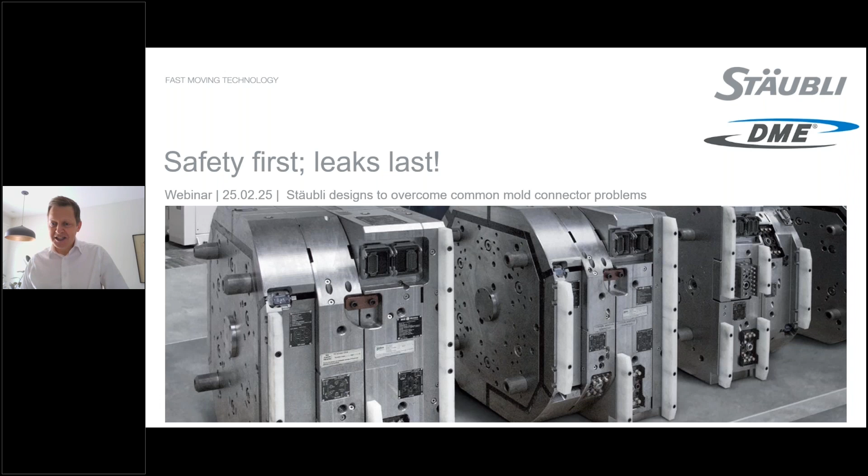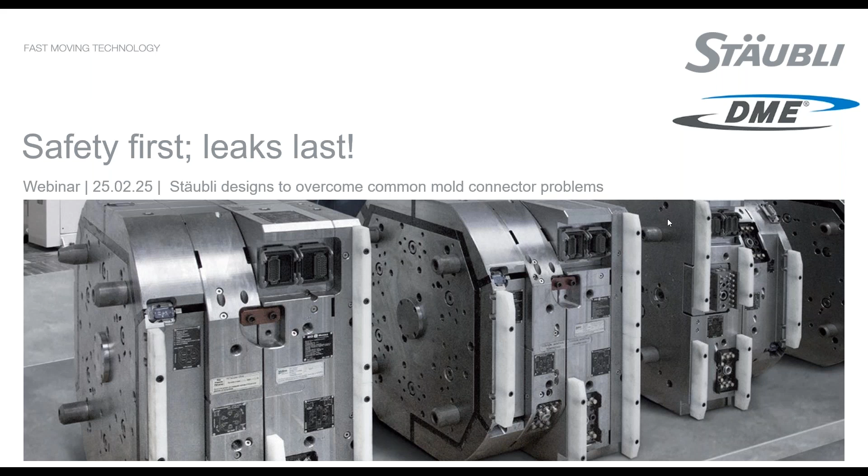Okay, so as Mark mentioned, these solutions we're talking about today are already live and available on the DME eSTORE. From Staubli's side, we're very happy to partner with DME, a company with a long and successful history in the plastics market. I believe DME started in 1942, so that's 81 years. Staubli has been making fluid connectors since 1956, 68 years - not quite as long, but we're very happy to work together and bring DME's customers Staubli's range of high-performing connectors.

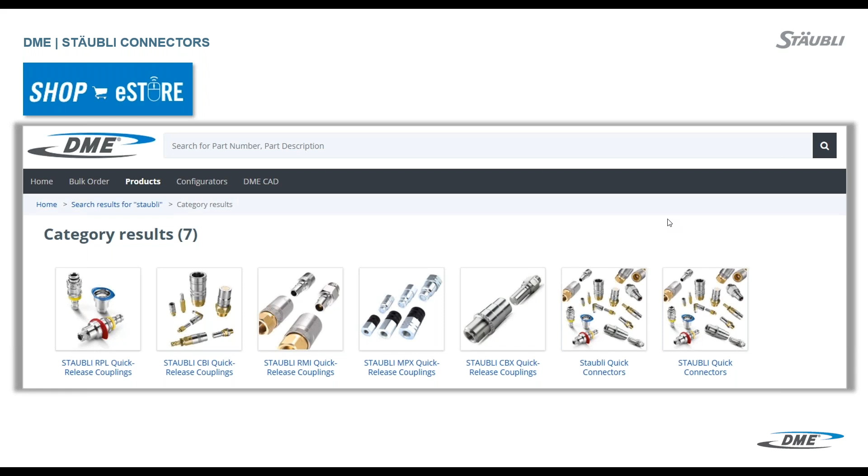So I just said high-performing, and that is really my goal today: to explain where some of the issues with connectors come from, what's behind a good functioning connector, and how they can help companies improve overall efficiency in molding operations, whether it's connecting mold circuits for water, hot oil, or hydraulics.

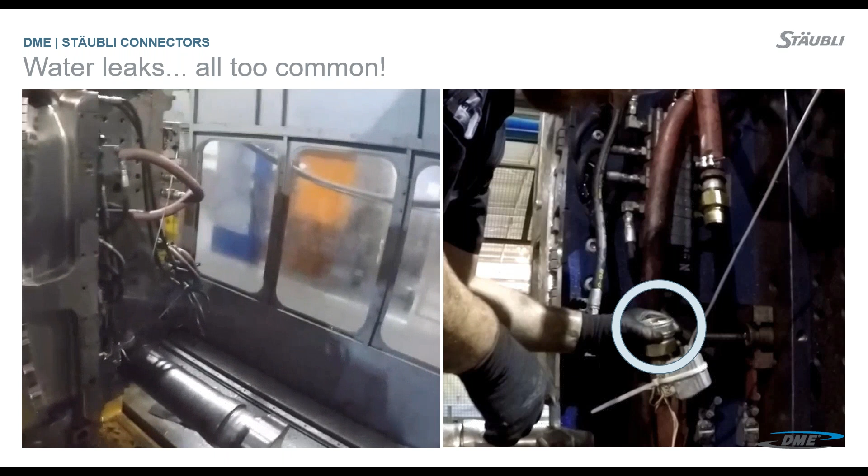So here's an example - this might look familiar to many people on the call. It's not easy to capture leaks on video, but I'm sure many of you who are working or have worked on the shop floor have seen similar situations, and you probably have a strong intuition about the impact on efficiency, part quality, and safety when leaks like this occur. In this example, the main O-ring seal between this connector's plug and socket was worn out and became dislodged, causing a leak during operation.

This one's slightly different. This time, the internal O-ring for the valve on this connector had an issue and got worn out, so here the leak happened in the disconnected position. Same result though - some machine downtime, and unfortunately for this operator, he had to climb into the machine for water.

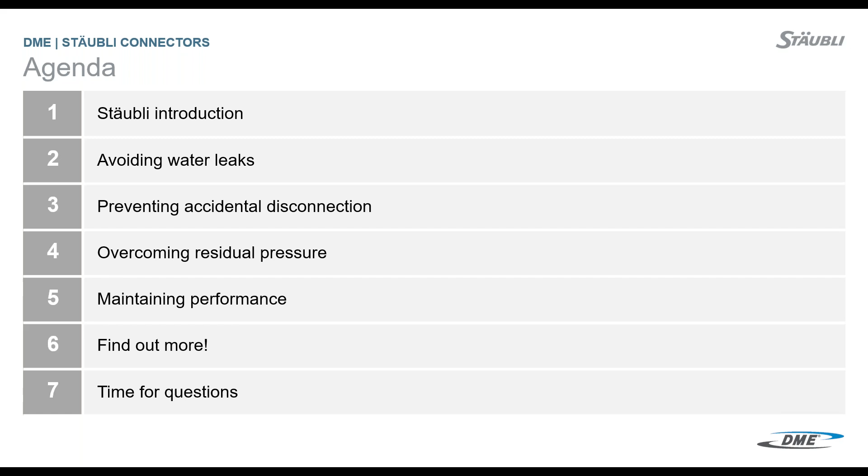So the plan for today is to talk about leaks from quick connectors, as well as issues that can affect connector locking mechanisms and potentially cause accidental disconnection. That's quite a safety risk. Solutions for connecting with residual pressure in hydraulic circuits. And finally, to share some details around connector performance in terms of ergonomics, and also ensuring that any pressure losses or impact on mold cooling can be mitigated. So I hope that sounds okay.

Okay, a brief introduction about Staubli. We are a global company. We have 4 divisions, and what ties them together is really innovation. Staubli's aim is to offer advanced solutions to increase our customers' efficiency. On our website, it says innovative solutions for higher productivity.

I'm part of the fluid connectors division. We also have an electrical connectors division, robotics - they make robots and AGVs - and the original one is a textile machinery division.

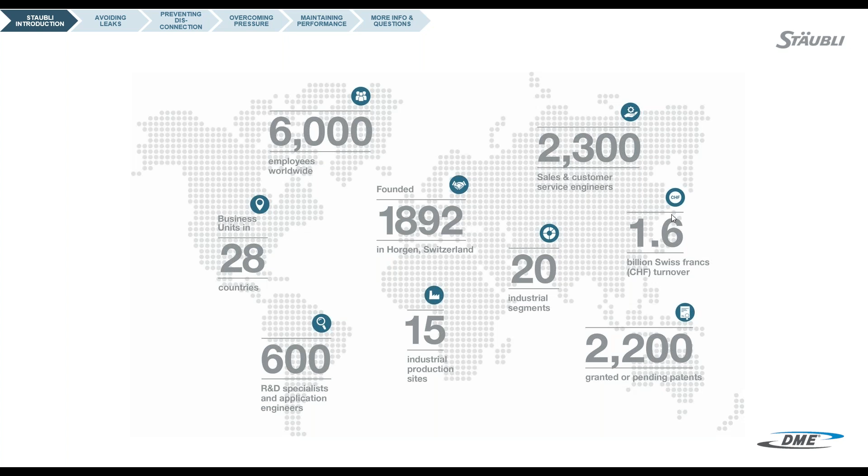With that focus on innovation, the company is very proud of our investment in R&D and engineering. You can see here we have 600 specialists and application engineers around the world, and the company holds over 2,000 patents. In terms of size, Staubli is available in 50 countries. We operate in 28. Our global workforce is around 6,000 employees, and the combined turnover of the 4 divisions is 1.6 billion Swiss francs.

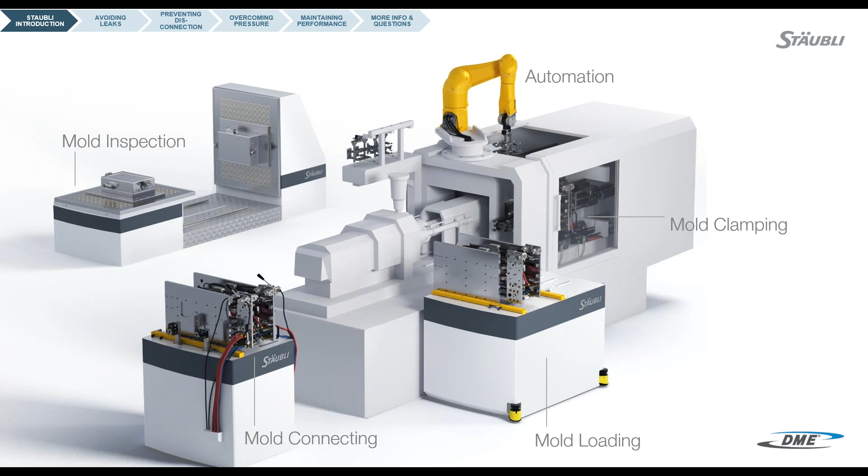For fluid connectors, the division I work for, plastics is our biggest market. Today we're talking about connectors that you can find on DME's website. But for your interest, Staubli also designs and develops other quick mold change solutions, such as magnetic clamping and mold loading products with some automation. You can find out more about that on Staubli's website.

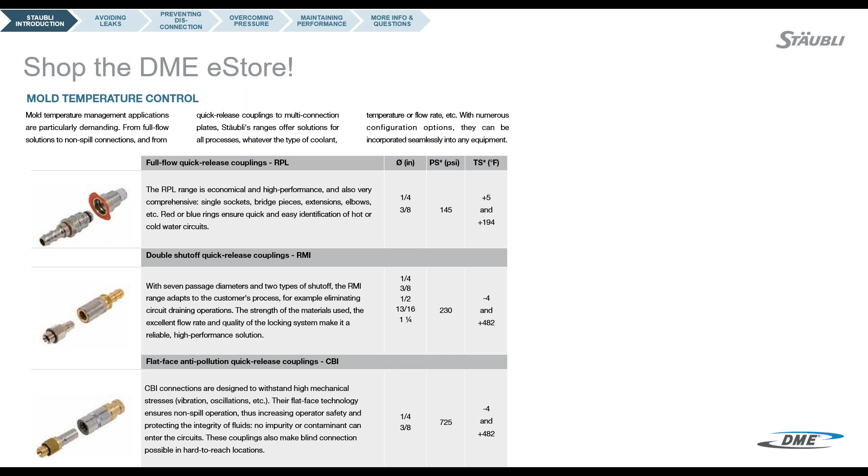Here are the connectors now at DME. These first 3 are for mold cooling. We have a full flow option, that's our RPL connector. We have a double shut off connector, that's the RMI, with integrated valves so the water gets checked automatically when the connector is disconnected. The third one is also double shut off, but this time with a special valve design where it's flush - no drips come out of this connector at disconnection. That's very useful for high temperature applications in particular.

And we have 2 hydraulic connectors, also drip free. The second one here in particular has a feature that helps when there's some residual pressure in the hydraulic circuits.

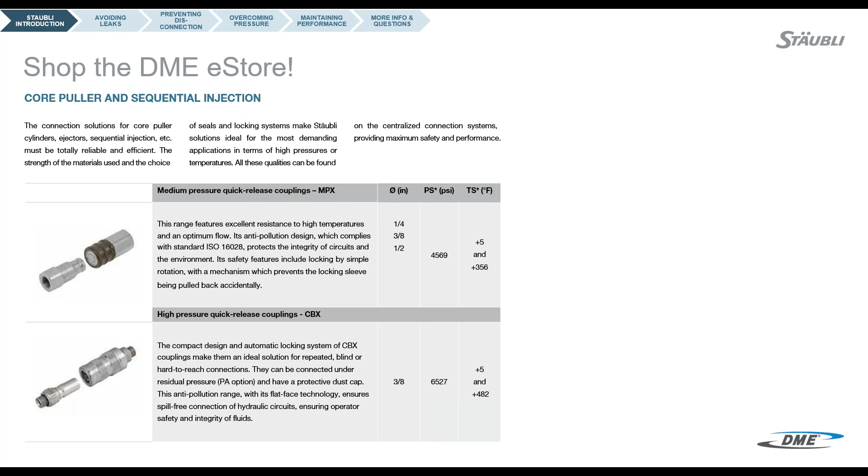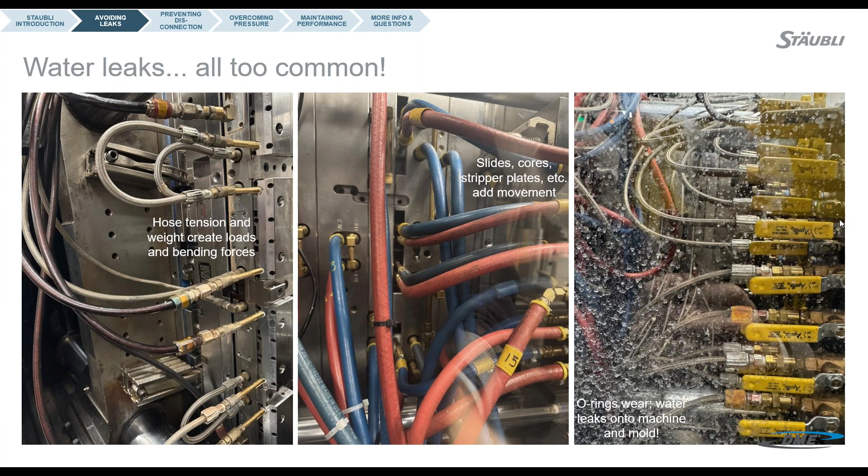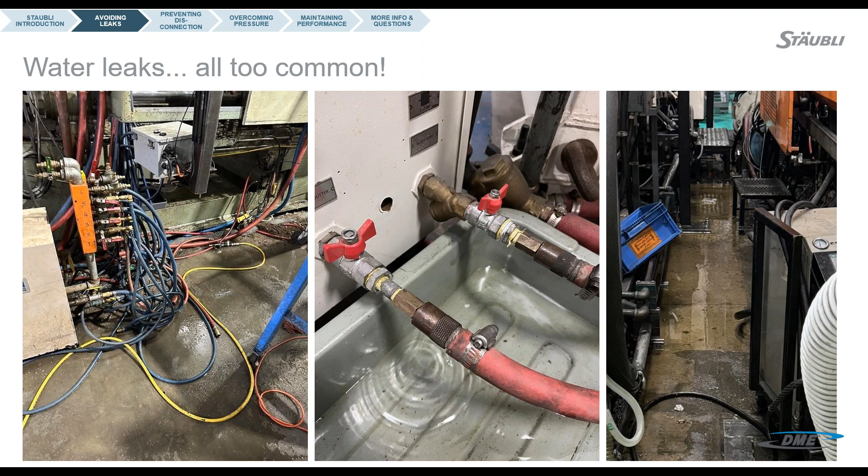A couple more examples. This time, at least the leaks aren't next to the mold - they're not inside the machine, but connectors mounted on the back of the thermolators around the machine, and obviously still causing a mess, creating a risky environment for employees and generally reducing overall productivity at these companies.

So what can we offer to help? Well, there are two key design features that help withstand these forces and motions and keep a leak-tight connector.

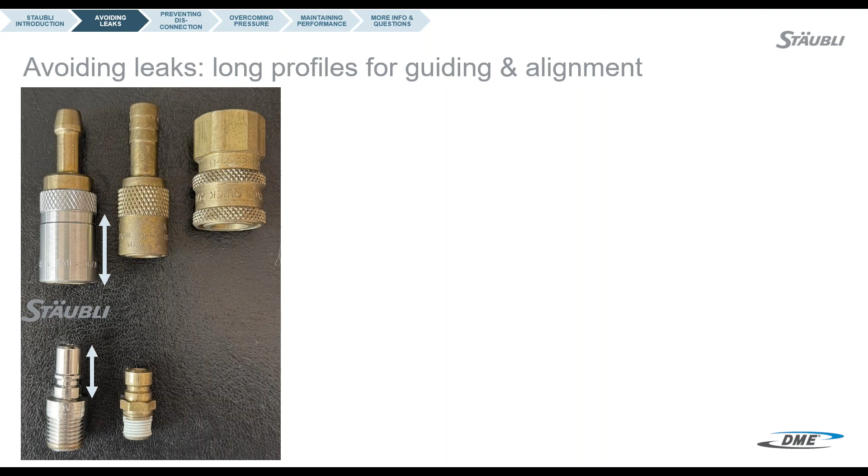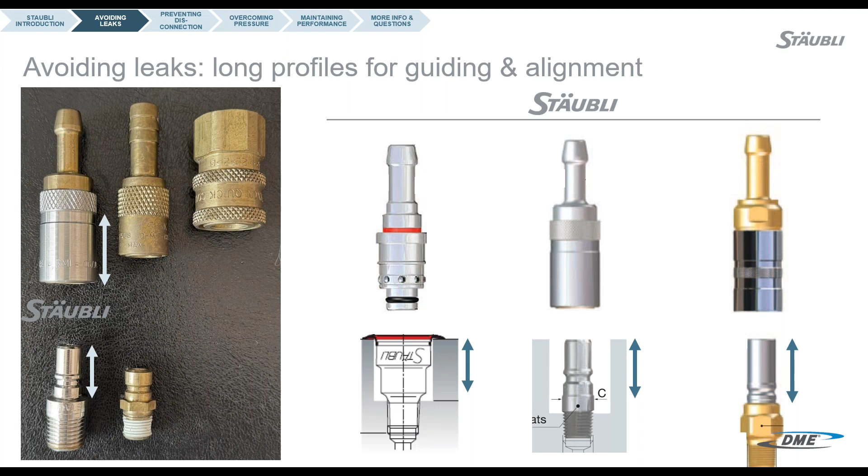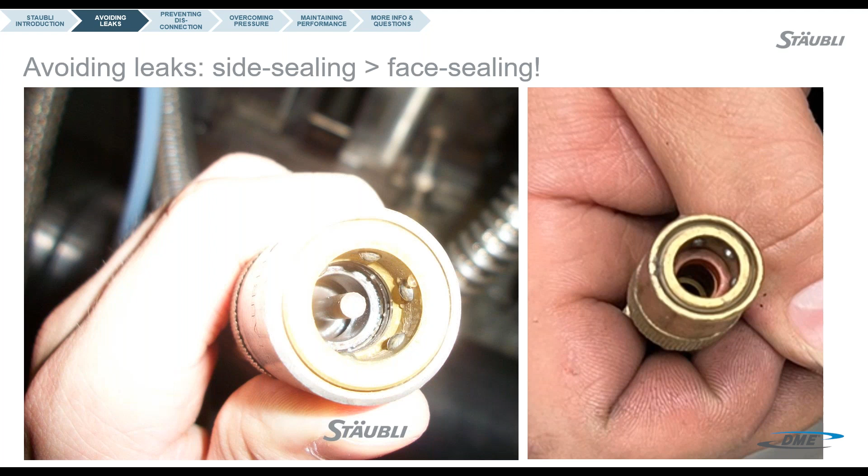With a Staubli connector, the one on the left, the sealing is actually done on the side - not on the front of the plug, but around the circumference of the plug. Together with that strong alignment, that significantly reduces wear and keeps those connectors leak-free over time. All of our solutions are designed this way.

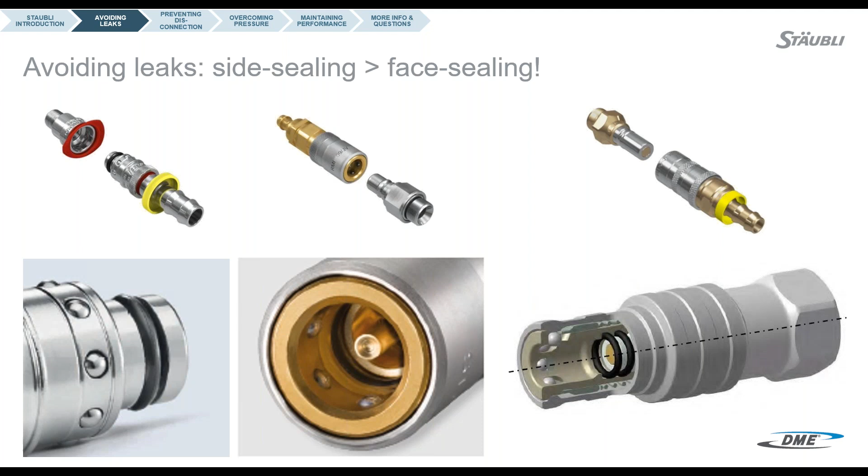I think this might be more of a nuisance or an ergonomic issue. Maybe the real safety issue comes later if this connector doesn't connect well and there's a potential accidental disconnection during operation. Accidental disconnection is especially risky when there's hot oil and water, creating a risk of burns for operators using them.

This is when connectors inadvertently pop off during use. It does seem frequent, unfortunately, so much so that there's a common solution - kind of a band-aid solution, I think, that companies take. They install those red and blue plastic clips behind the locking sleeve, trying to make sure that sleeve can't move and can't come disconnected.

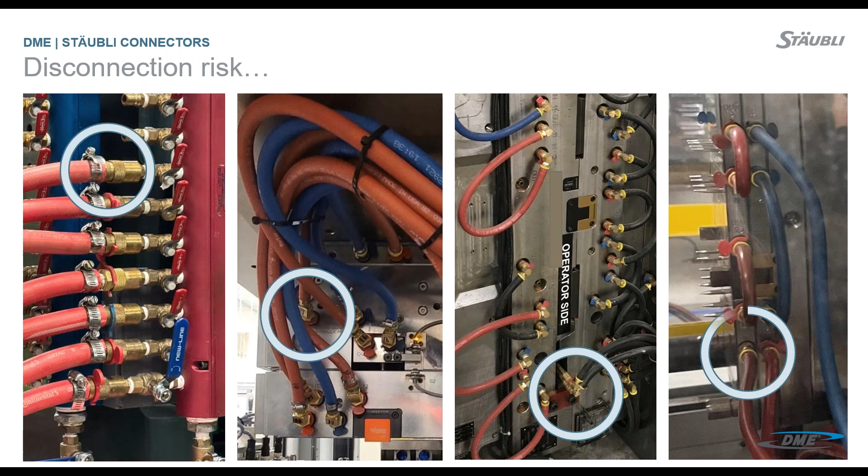So the same challenges with sealing are also affecting and potentially compromising the locking mechanisms, leading to that accidental disconnection. It can also be exacerbated by dirt or debris getting underneath the locking sleeve. Here, the choice of construction material for those critical locking surfaces is important.

All Staubli parts have some form of hardening or a stronger material beyond raw brass. Brass is really the default material used by most other connectors in plastics - it's cheaper, but it's also softer.

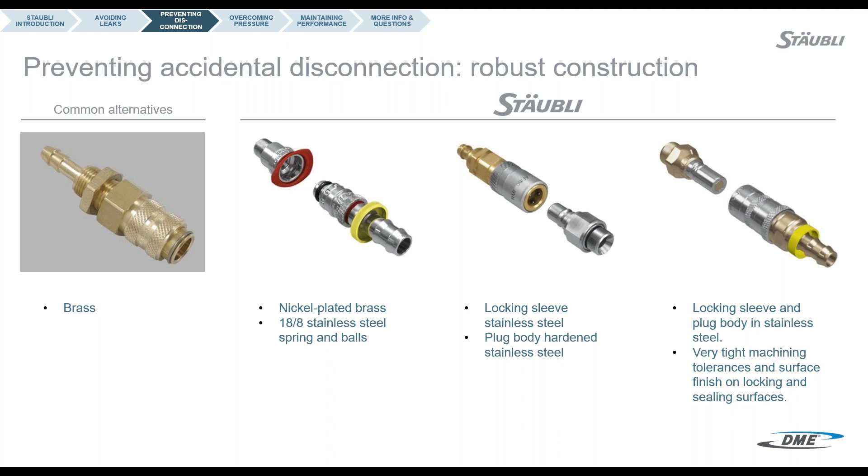If you look at the RMI, for example, that's the one in the middle of Staubli's solutions. Those material choices are what give it the increased robustness for the locking. It has 6 locking balls, very similar to most 3/8 inch connectors in this example, but the plug is made of hardened steel along with the corresponding locking balls, and that locking sleeve is also made of steel.

The RPL on the left is nickel plated brass. This time the design's changed, and Staubli has added and now has 8 locking balls to better manage the forces for this connector. And finally, the one on the right, that's our CBI, with both stainless steel locking surfaces and up to 9 locking balls - really the ultimate connector we propose for applications with lots of vibrations and oscillations.

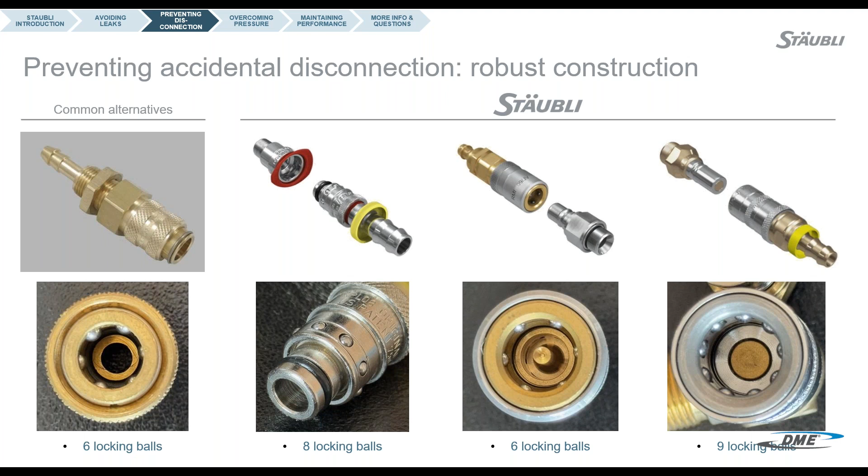Valving in connectors also adds a layer of safety at disconnection. The fluid is automatically shut off at disconnection, especially with the flush face design on the right, where these valves touch together so there's no space between them and no fluid can escape when disconnection happens. That's why we recommend this one for high temperature water and oil applications.

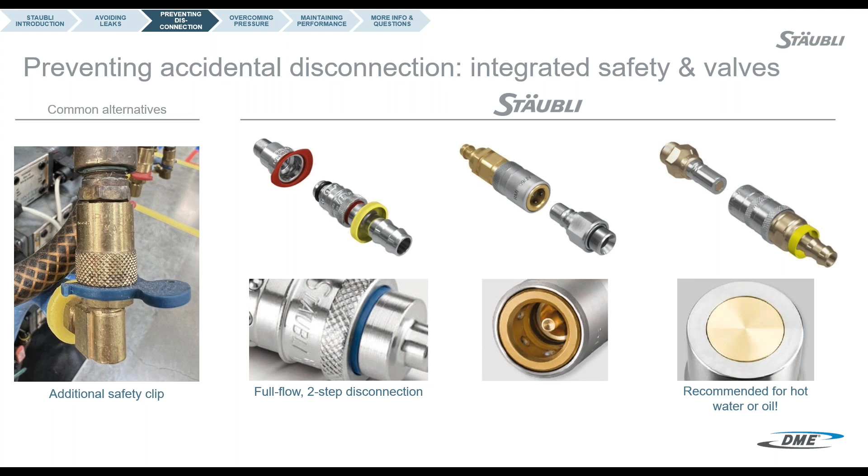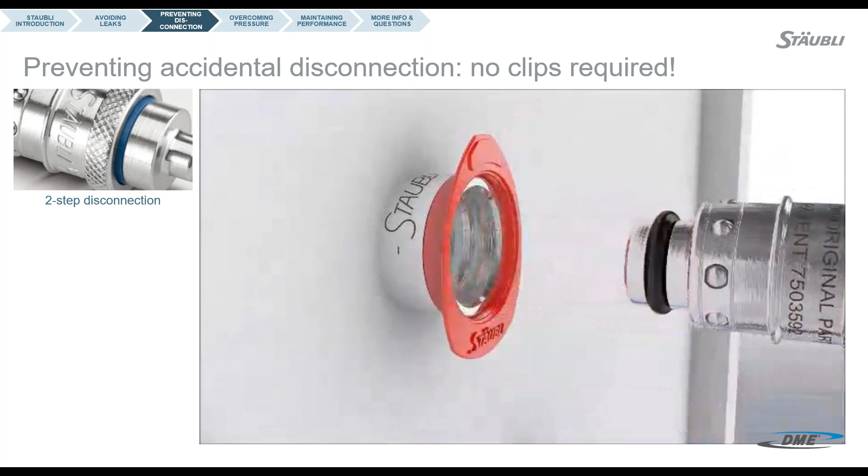For our full flow solution, the RPL on the left, there's a very nice safety feature. The lock is designed to require two very deliberate actions to open the connector. As you can see in this animation, the connector has to be pushed together first before the locking sleeve can be pulled back. This means it can't be knocked off by accident, and there's no need to use one of those plastic clips that can get lost.

Speaking of robust materials, for hydraulic applications, as pressure in the circuits increases and there's higher separation force on the connector, Staubli uses even stronger materials. Not just the locking surfaces, but the body of the connector and the back adapters are made of steel for that higher internal pressure. This connector, as an example, has 10 locking balls, given the higher force applied during its operation.

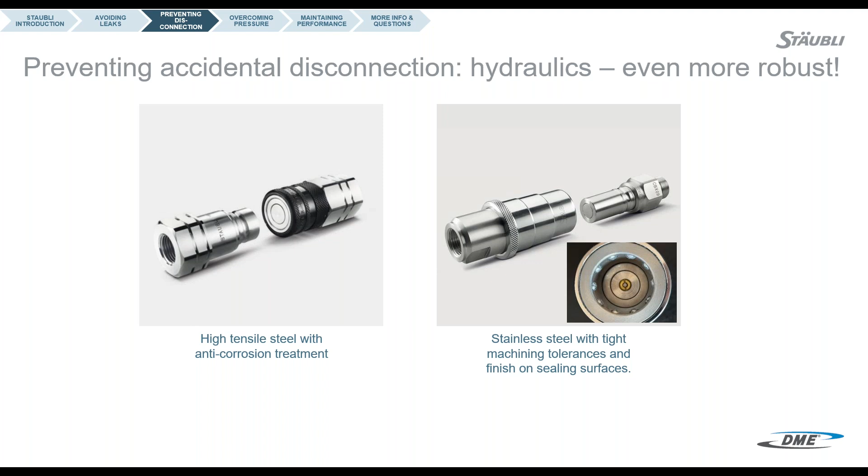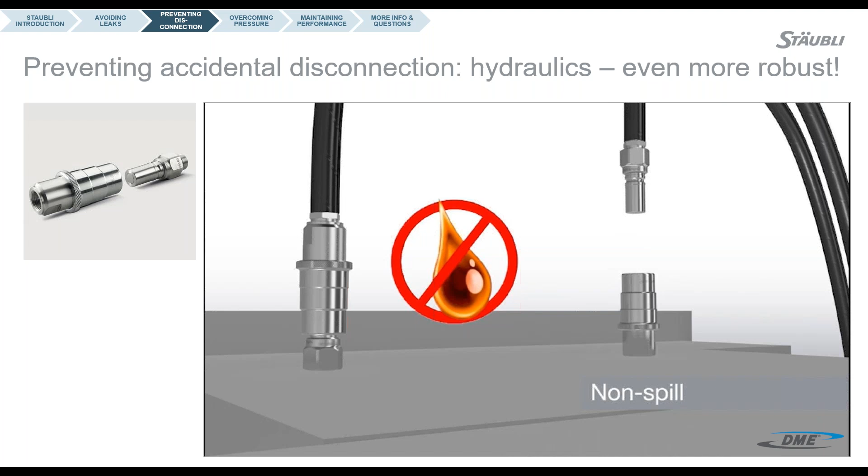Both of these hydraulic connectors have the flush face, non-spill valve I was describing. No oil dripping out, but also helpful for hydraulic circuits is that it doesn't allow any air to get into the circuit during connection, which can happen with some other styles. With poppet valves, for example, often some compressible air can get into those hydraulic lines.

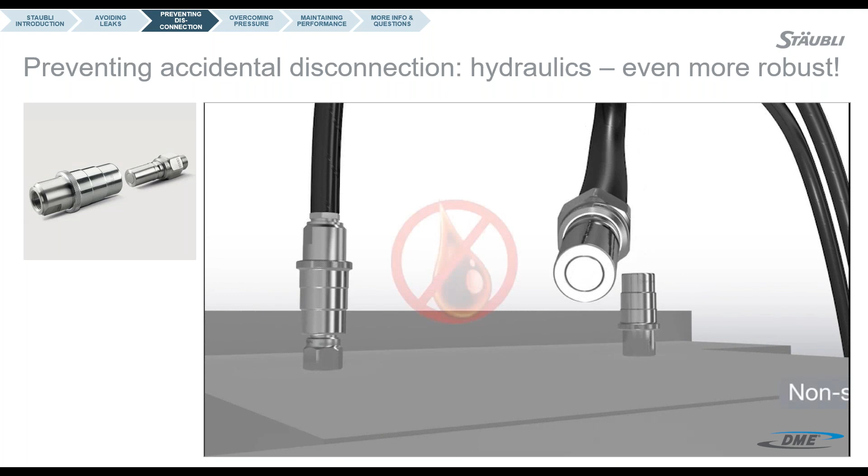As a side note, since I was mentioning valves, I thought it might be interesting to share one thought. Valves can actually be quite interesting and helpful for companies trying to follow a SMED process to reduce mold change times. We see a lot of lost machine time from draining water from a mold into a bucket, often while the machine is idle and not making any parts. Having a valve in that quick connector can make it possible for draining the mold to be externalized from the mold change process.

It can be done after the mold change, once the machine's back up and running, maybe on the floor or back in the mold shop. Even just leaving the water in the mold is quite common if that mold's going in and out of the machine frequently, and that'll save some time on the mold change process.

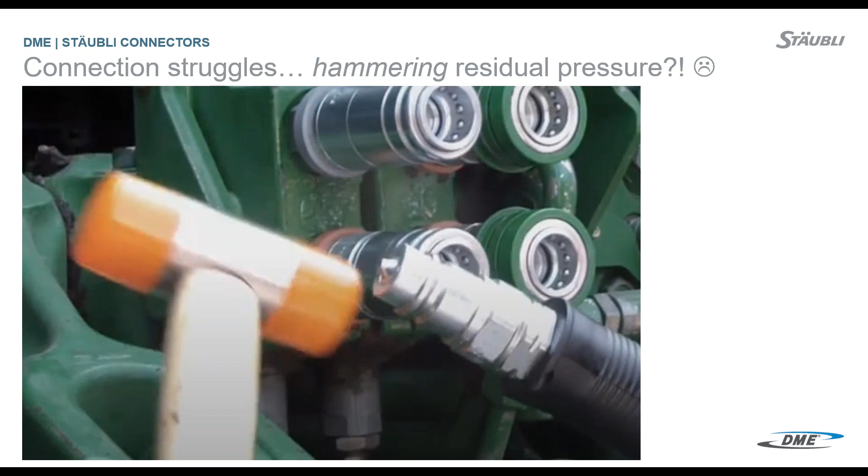Back to connection issues. This one is a little specific, but you might have seen it in your facility. It often happens when there's no return to tank function on a machine's hydraulic core circuits. The typical brute force solution is for a setup technician to head over to their toolbox, grab a hammer, and try to crack open the valve to relieve some of the pressure so they can run the mold.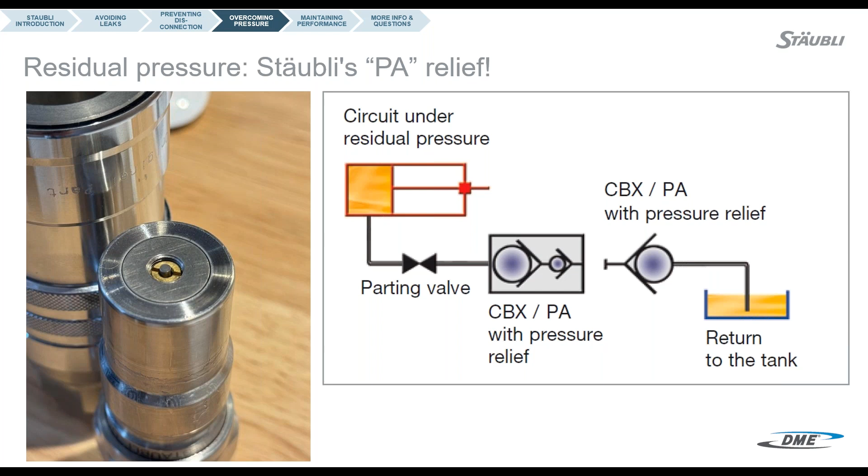Happily, Staubli has developed a pressure relief solution, shown here. There's a very small bleeder valve on the nose of this CBX connector, and the operation is done simply by pushing the connectors together, no specific tools required. As they're pushed together, the bleeder valve opens and lets some pressure out. This allows the valves in the connector to travel back into the circuit and the connection to be made and locked. This is our CBX connector, and these part numbers with this feature all have the PA designation at the end.

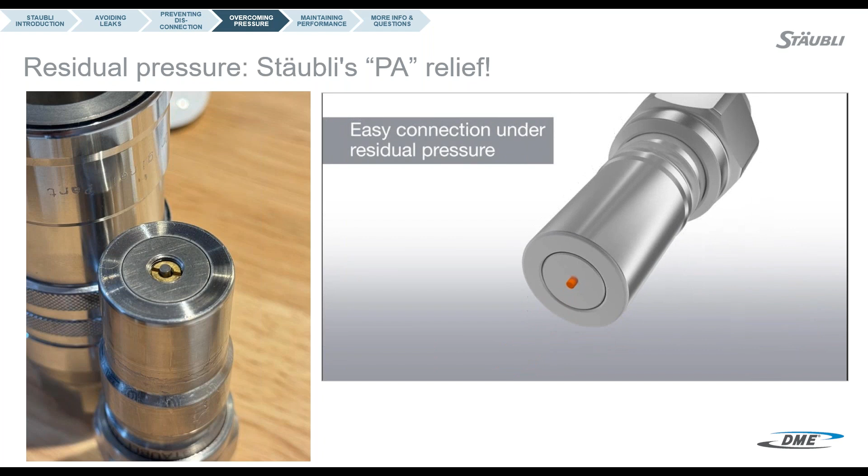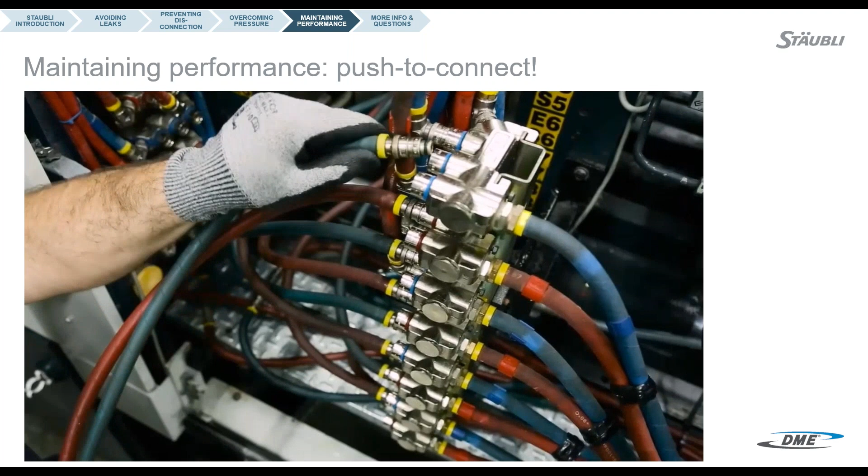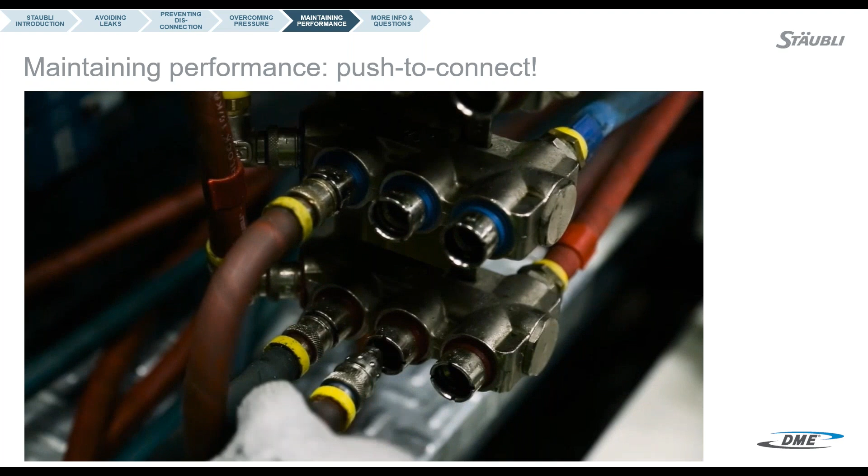The last section is really around performance, in terms of how these connectors function for the people using them, the process technicians, the mold setup team, and tooling guys in the tooling room, and also performance in terms of how the connectors function relative to the internal flow and cooling of the mold.

This video shows how easy it is to operate this RPL connector. At Staubli, we call this locking design fully automatic, in that it's simply push to connect. There's no need to pull back a locking sleeve before making the connection, just push it together.

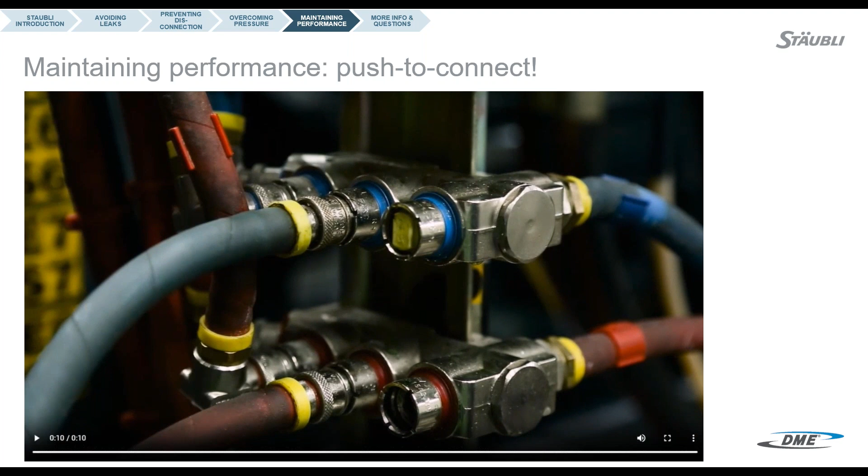All of those Staubli products, with the exception of the RMI family, which we call semi-automatic, where you do have to pull back the sleeve, the other ones shown today, like the RPL, are automatic push to connect solutions. Very helpful for improving ergonomics.

Here's an example of a hard to reach place that we often see. If the mold has water outlets on the bottom, it's hard to see where you're connecting, and for an operator to just be able to reach under and push it to connect is very helpful for these types of applications.

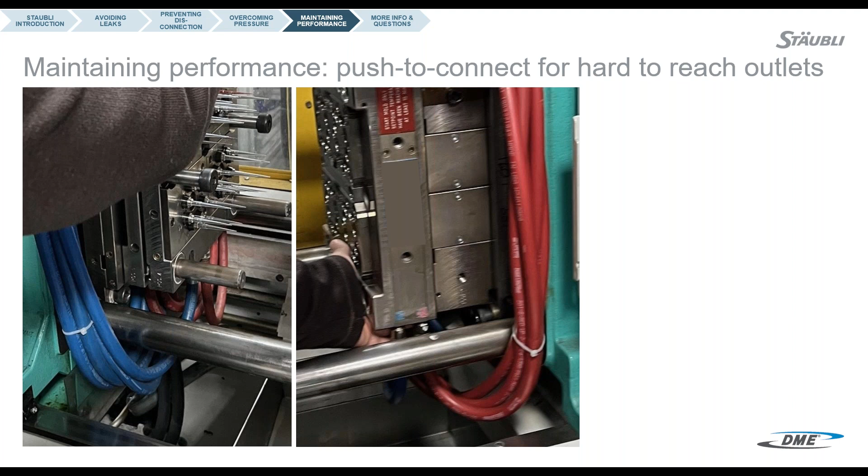As a side note, this is the connector with that two-step disconnection. That can actually be done with one hand, holding the hose and then pulling with the thumb and forefinger to make those two distinct actions. So I think it still works very well ergonomically, connecting and disconnecting in this kind of situation.

Okay, so in terms of flow performance, I know many process techs get worried about the idea of introducing a valve in the connector. They're concerned any sort of restriction or impact on flow rate can affect cooling of the mold. So I thought it would be worth mentioning a few details.

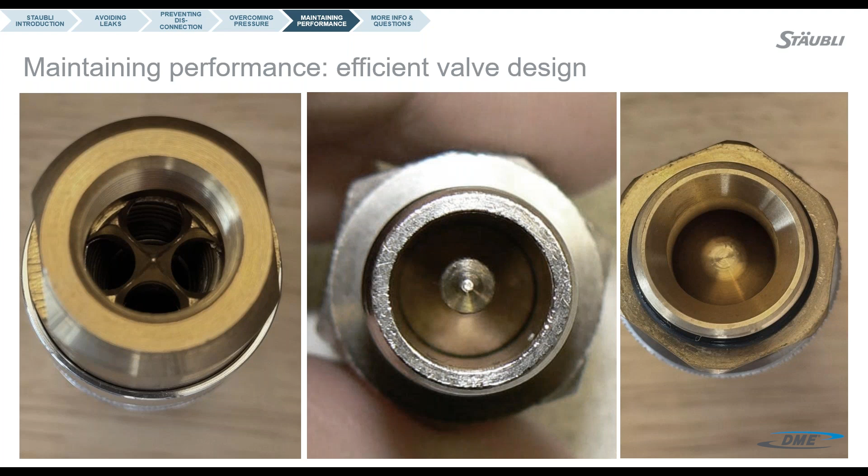In these photos, you can see the care that Staubli puts into the valve design. Some complex machining, conical shapes or smooth radii, all of that to make sure and try to maintain laminar flow through the connector. We make flow charts available. You can actually quantify the performance and check the size of the connector is appropriate with the valves for an application.

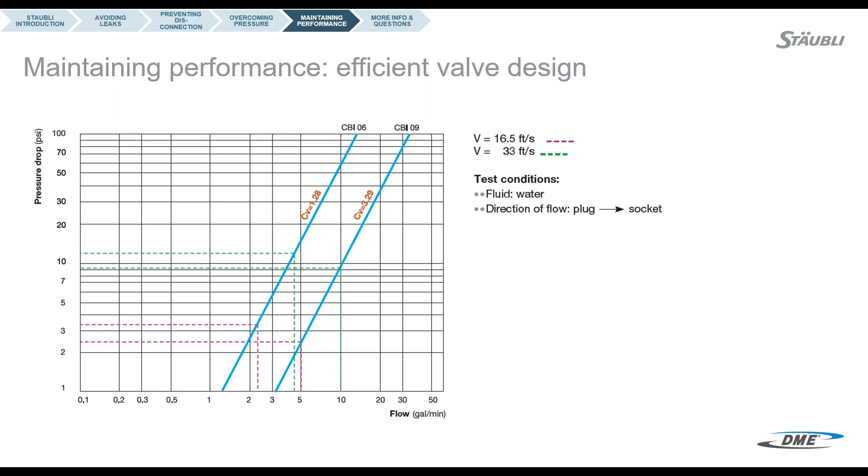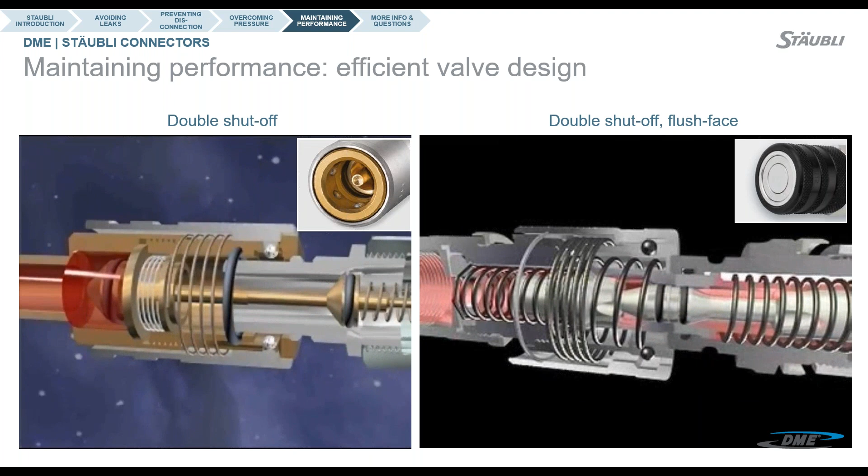If you compare that to the path of the fluid going through a flush face connector, here the valves are not at the back of the connector, they're right at the front and they're right together. So the flow, as it's going through, only has to pass around one feature. It makes it much more efficient.

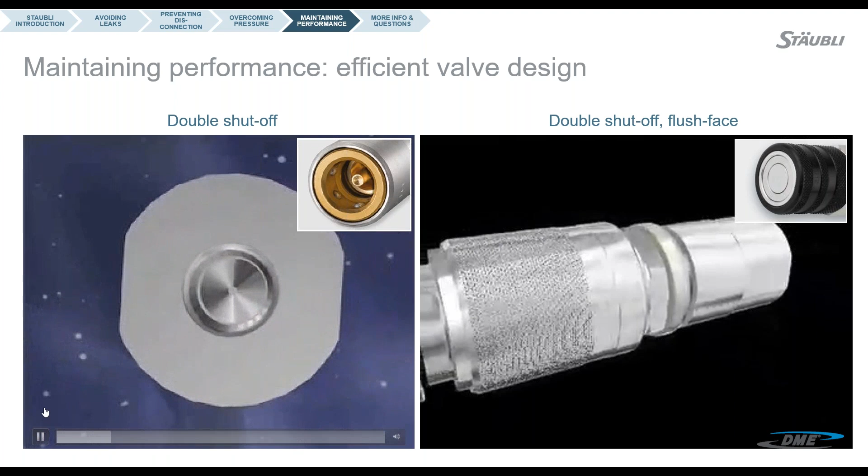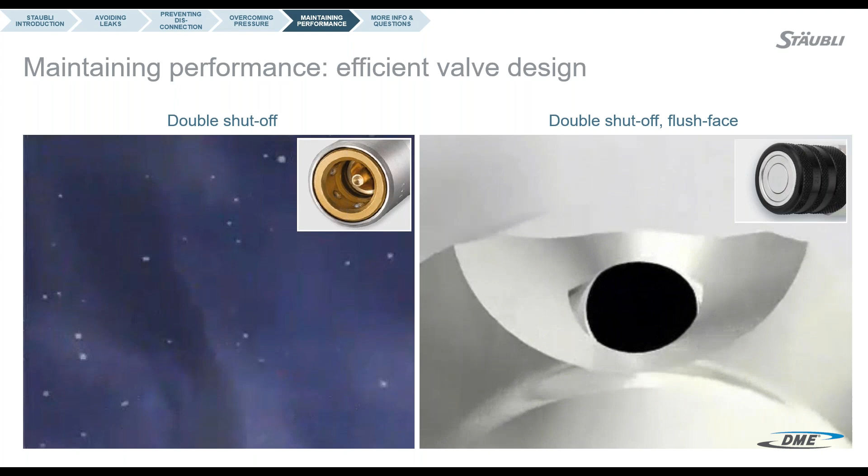On the next slide, I can show you that same point in a slightly different way. If we take a trip through the connector, this is the double shut off, going around the first valve and then around the second valve, compared to a trip through a flush face connector where you pass the valve holder and then it's really just that one valve that the fluid is traveling around, making it quite efficient.

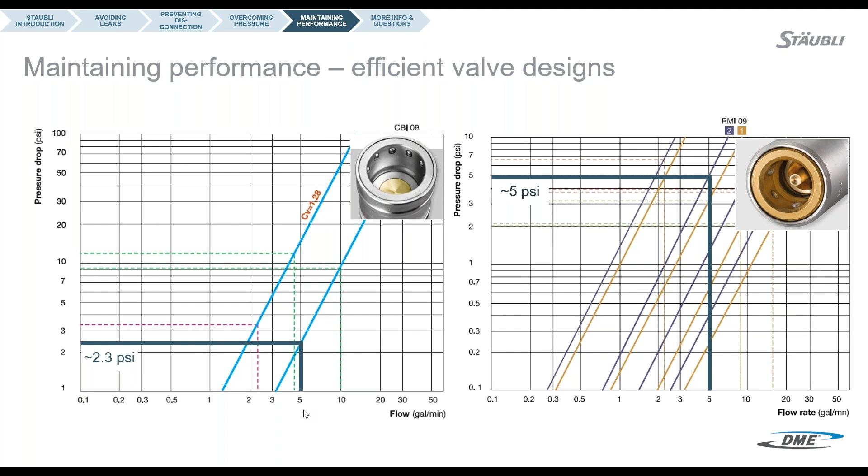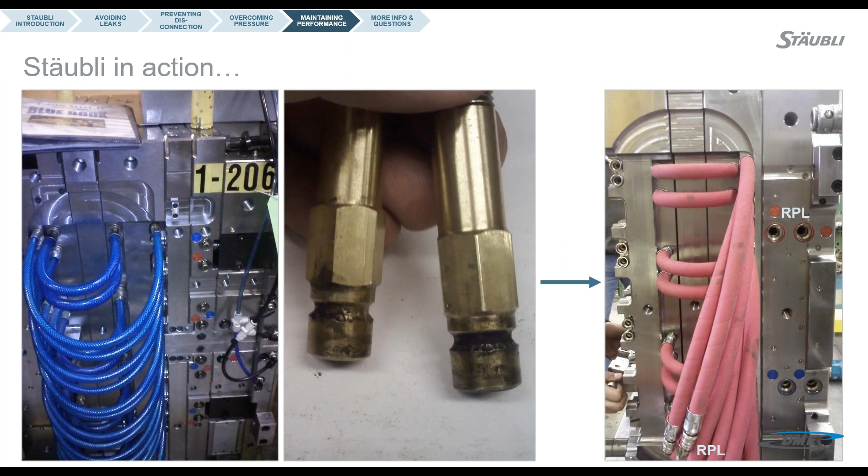This one I actually showed a little bit earlier in the presentation, where this customer was struggling with that Brinelling failure. You can see going from that solution on the left, they've now installed RPL sockets on their molds. At the bottom of that red hose is the RPL plug ready for connection.

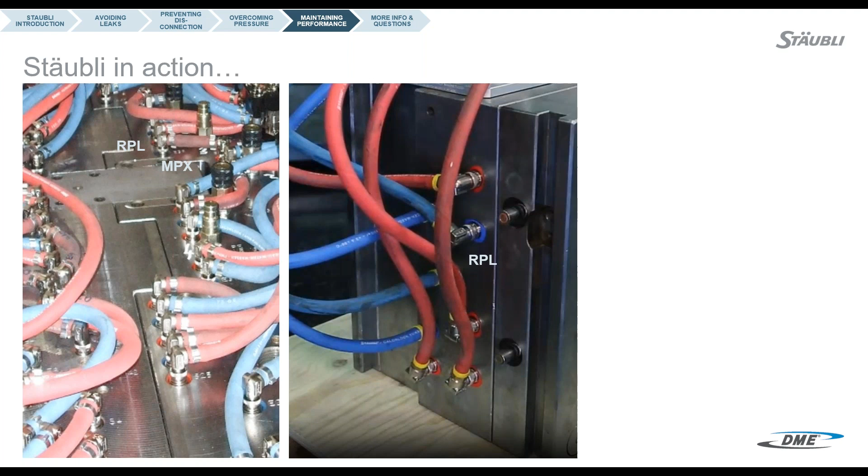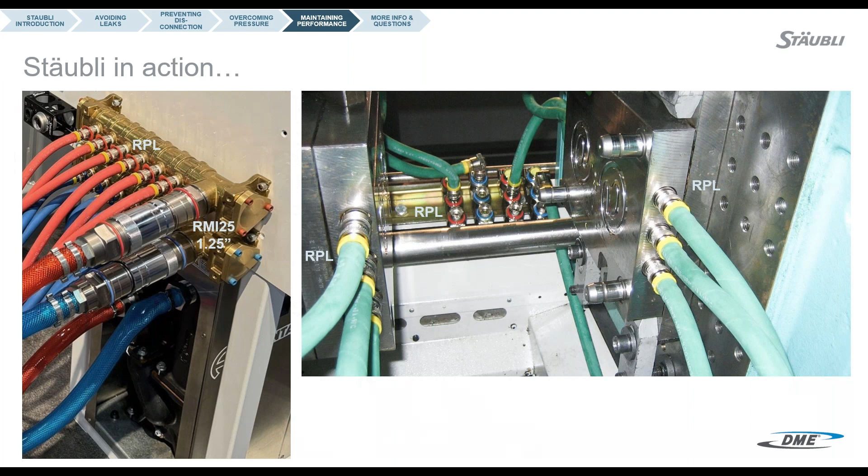Some other examples of that product being used. This is actually something we see more and more interest with a solution for large diameter connectors. A lot of customers seem to use cam lock connectors that are full flow, and there always seems to be some residual water inside those large hoses that spills out onto the machine during every mold change. Over time, our customers report they get damage to their tie bars, even rust on the skates under the moving platen that damages the ways.

Can be very expensive to replace. So the RMI 25 is a great option to add some check valves and make sure that water stays in the hose and it doesn't spill and damage the machine.

This is also a nice example. This customer has a machine with a rotating platen on the moving side, and they've also got a Staubli magnetic clamping system. That's the steel with the brass rings, that's our magnetic mold clamping solution. You can see the power connector for the electrical going to the magnet is right below those connectors. So in this application, with that motion coming from the rotating platen and the proximity to that electrical connector, I think the RPL was a great choice.

Non-spill connector is going to manage those forces very well. And then another one, a similar setup on that machine with CBIs coming off these water outlets on a rotating platen.

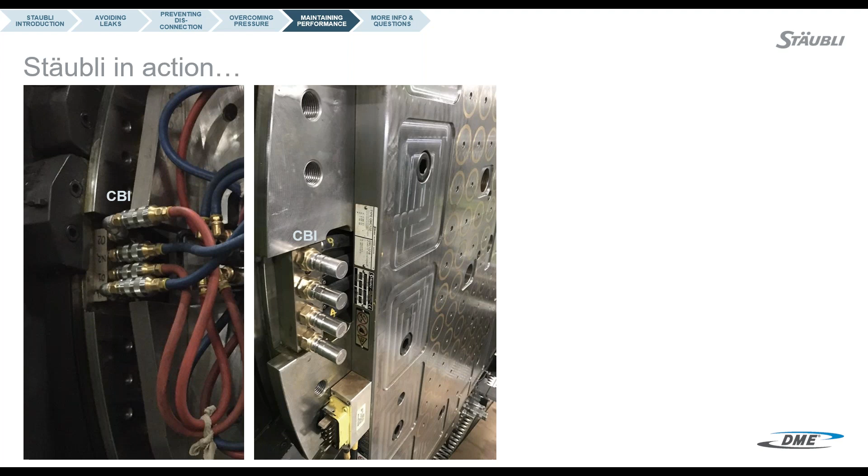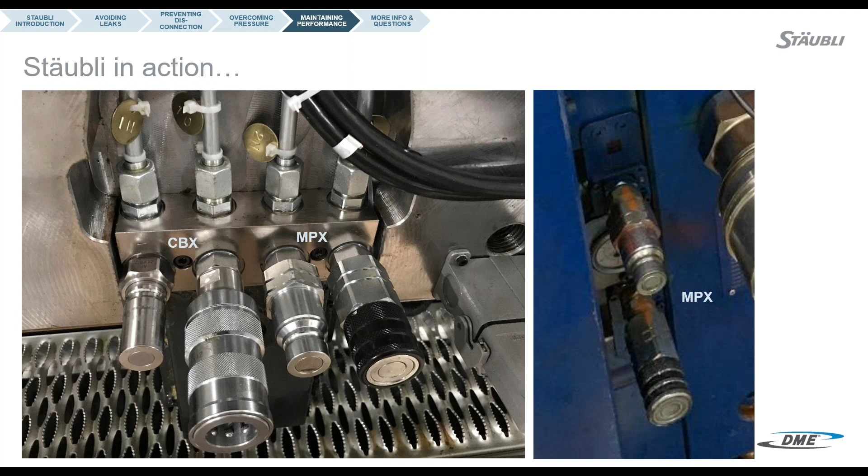So the hoses from circuit 1 and circuit 2 can't be cross-connected by mistake. And finally, a couple more applications where you can see both hydraulic connectors and water connectors on the same machine. This is a vertical machine on the left, the CBI for water, and the CBX for the hydraulic cylinders. On the right, again, that large diameter RMI 25 in the bottom of a manifold, together with some hydraulic MPX quick couplings on that mold.

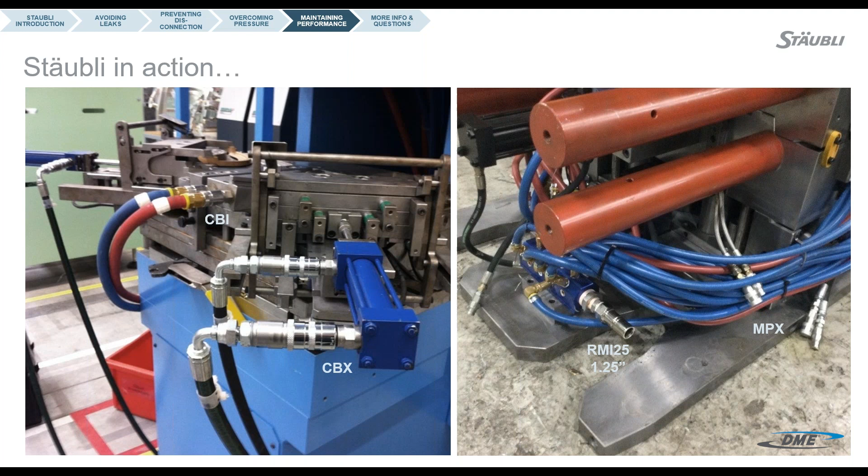Okay, so hopefully these examples have sparked some interest. To let you know, there is lots more information. DME has done a great job of putting technical details on their eSTORE.

Yeah, that's true. I can share my screen again just to show that detail. Actually, this might be a good answer for this question - here's a clip I didn't show earlier. Typically the male side of the connector is mounted on the mold. With the RPL, it's inverted, so it's the female part, the socket, that's mounted in the mold. I think it's just a design choice.

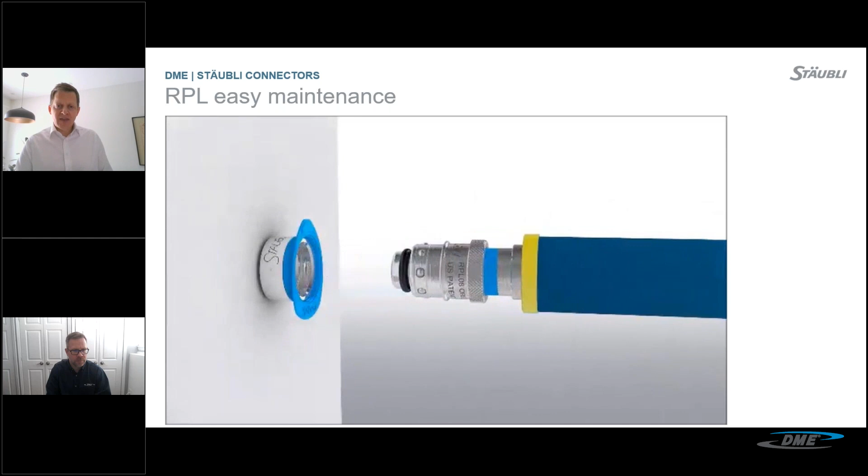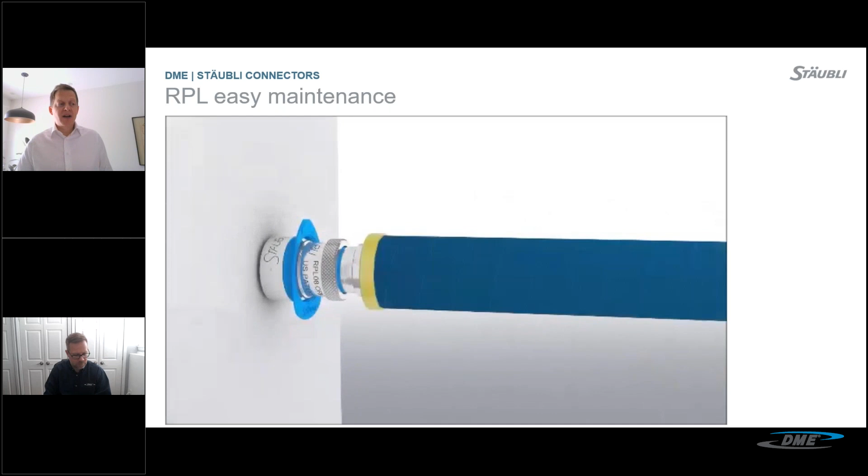It does bring a couple of features. That two-stage disconnection I mentioned earlier can be integrated into the plug. It also makes maintenance of that O-ring very easy. They're designed for long life, but if the elastomers get hard over time, perhaps with consistent high temperature over the years, it makes it very easy to swap out that O-ring if the connector is designed this way. I think those are the main reasons why it was done that way.

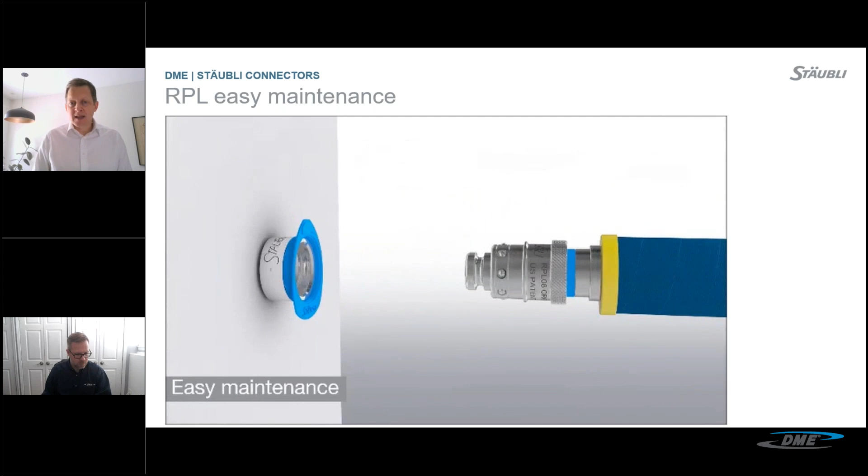Okay. What is the oil temperature limit on the CBI connectors?

Yes, I can tell you if you give me one second. I'll give you the real answer. So for these parts, all are coming with a fluorocarbon seal. So the high temperature rating is 392 Fahrenheit.

And then, what is the typical lifespan of Stäubli connectors? Typical lifetime really depends on the conditions, the frequency of connection and disconnection, the forces being applied, the cycle time of the machine, how much they're being moved around. So I don't have a very specific number available, but the idea with these solutions is, rather than having an existing solution where you're replacing seals frequently, these are long life solutions where you don't have to do that. You avoid all that work and keep them leak tight for a long amount of time.